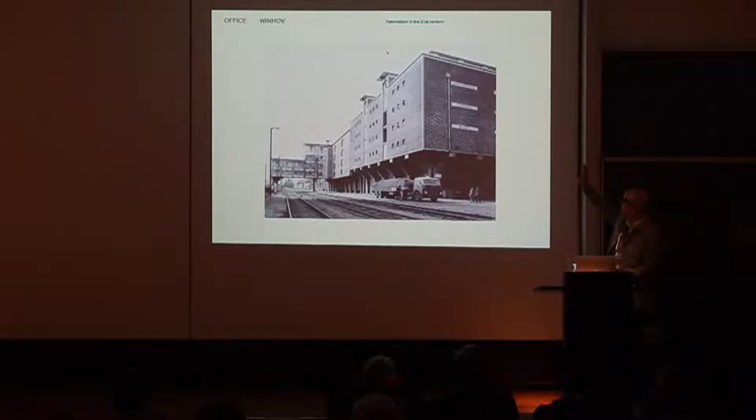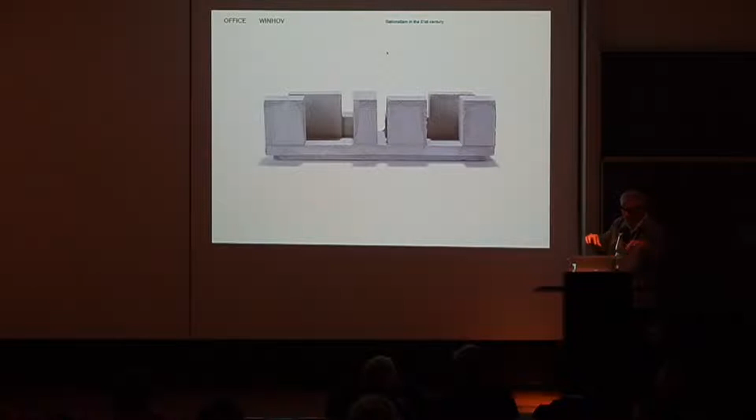And as young architects, there were 3 offices that we also more or less grew up as a generation through these projects. We were asked to work on 6 towers, 2 buildings along the water, on a double-story parking garage. And to understand it, we had this small model on our table, and we were asked to do the 2 outer small blocks. 10-story high, or 11, social housing.

I won't go too much into the plan, but we were very fascinated with how you could construct a brickwork facade, how you could think through what it means to make a warehouse, actually. It wasn't so much a housing project for us. The idea was more to build a contemporary warehouse, a very neutral structure with a very neutral facade, where the living room could be the same expression as a sleeping room, as a loggia, as a kitchen, because it would change over time.

The whole design concept was that of a kind of open plan construction that you could change. And for us, echoing this idea of a 2-story plinth and then changing the structure of the building on the 5th floor so it would resonate with the harbor buildings along the water was of interest. So we built those 2 towers, and you see a brickwork facade, and a very practical one is a horizontal concrete band that projects a little bit out.

The outward projection is quite simply for fire safety reasons, so that the fire from one floor cannot go to the other floor, so that we could do these floor-to-ceiling openings that you could open, so that at least you could look out over the city. And originally we proposed to the city we do 2 exactly the same buildings, because I couldn't think of a reason to do 2 different buildings.

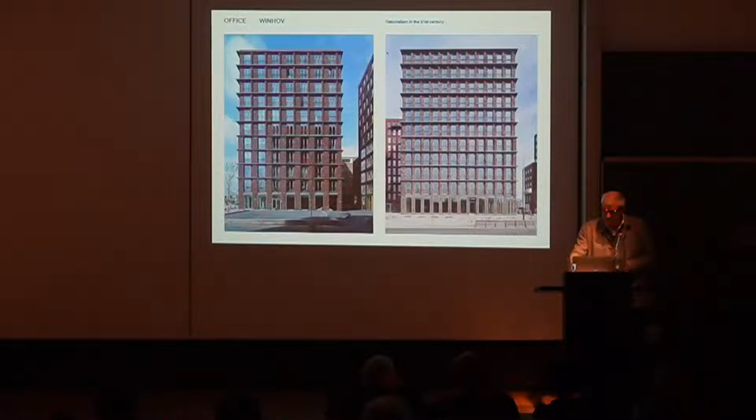So it speaks about the logic of construction. It speaks about the use of material. And of course, it speaks about where you build, where you are. And this rationalism, if you like, was pretty much there for us as a way of working, both in its logic, in its practicality, in its no-nonsense character, but also as a sensitivity to a place, an idea of type. These kind of things really stuck to us quite early on.

So I thought I'd continue then on concrete and not on bricks this time. We do a lot of bricks. I still love to work with the material, but we did a whole series of concrete buildings. And it's for the very same reason, the material I'm very fascinated with. We are working on a whole series of towers, or this kind of mid-high rise, 70 meters, which is the new urban standard in the Netherlands.

And I like to show them to you as how we work on, also that projects start to influence one another. So they become like a series, you know, it's the one individual object, but you invent something, you take that with you into a next project. So one of the joys of an office is not so much the singular projects, but it's this kind of line that you build up, this knowledge that jumps from one to the other, these kind of small discoveries that you make, that you take along.

This journey more or less started when we were asked in Switzerland with our partner Zeno Vogel to work on a high-rise building, Zölli, in Zurich West, where actually the plan and the structure was designed by Meili Peter Architekten, good friends of ours, and their facade was rejected. The office was a little bit in crisis. No, it was not a little bit. It was very much in crisis at a certain moment, and they asked us, please help us to design that facade.

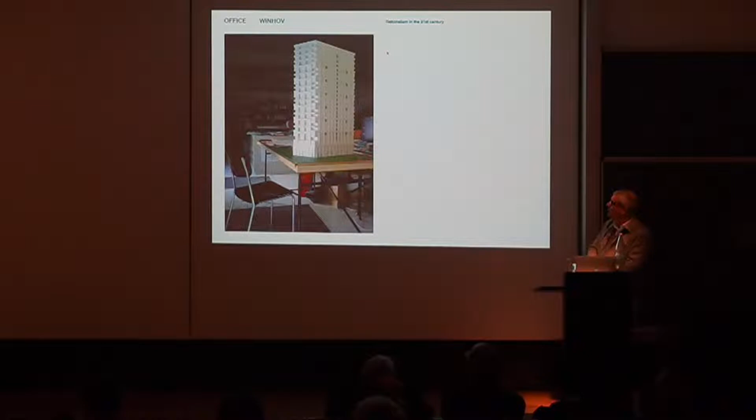And, you know, we went to meet the client, we walked out of that meeting, and there was a kind of advertisement on the wall in the street selling the apartments we still had to design the facade for. So, you know, 3 months, load-bearing, prefabricated facade in concrete. Think, work. So we built a model of the thing to understand it, to also understand how you see a split level on the heads of the building and normal running floors in it. So also in terms of typology, there was this theme of 3 floors that were always combined that we started to play with, and a structure and how you could make it.

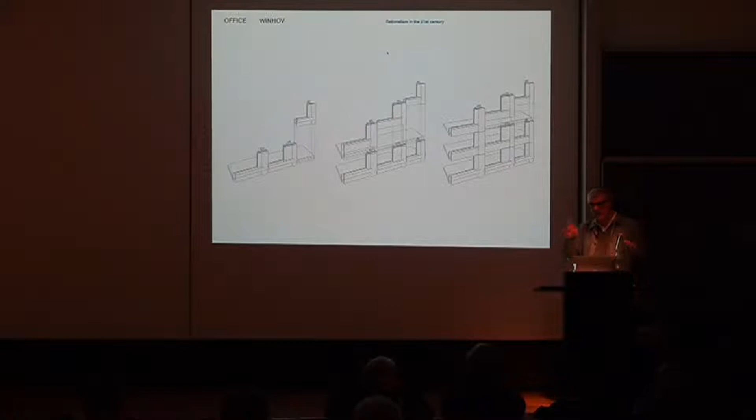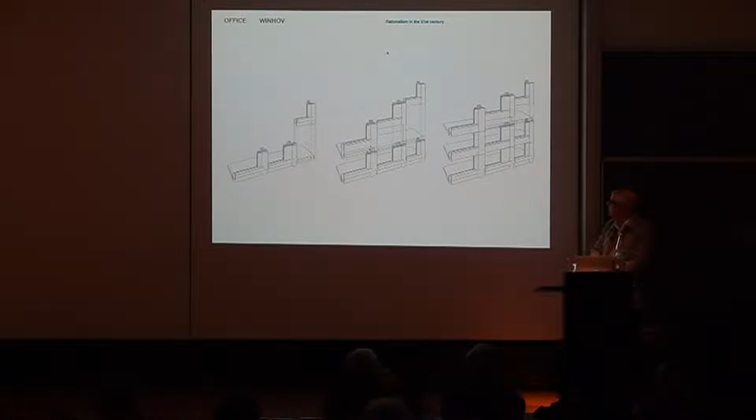And we developed at a certain moment an idea of L-shaped elements that you could stack. The core was in situ concrete sliding up, and then they would stack these elements around, and then they would pour a floor on top of it, and then they would do the next one, the next one, the next one. So there was a construction logic already decided before we came to the table. So for us, this whole question was, do we now make a big element with a window in it? And we decided to develop it in terms of L shapes, which of course resolves problems with joints, defines the window, defines the loggia, and has a certain logic and repetition to it.

And we thought, oh, it's going to be very repetitive, very easy. And then you make this drawing with all the different types that you get in the facade, and it always looks easy. So the story is like, no, we do everything the same. And then, of course, at the end of the day, each one is different. You get a repetition over 3 floors, and then the next one, which in the end was okay, because you can do a certain maximum amount of elements from a cast. So anyway, they would build different casts. So this is the kind of logic that you learn. It doesn't need to be repetitive all the way, because they just make more casts of the same type, so they can also easily make more casts of a different type. So it's this logic that we learned there. And that facade worked like that.

And it was a super efficient building site, which is very interesting. It was 2 cranes and a kind of scaffolding that would go up and down, and the building would just rise up. So no scaffolding around, extremely efficient, short time of building, which is, of course, with these types of buildings, very, very important. Speed of construction in a tower is what defines the price of the whole thing. The slower it is, the more expensive it is. Not about material use. It's really the rationale of building and of construction.

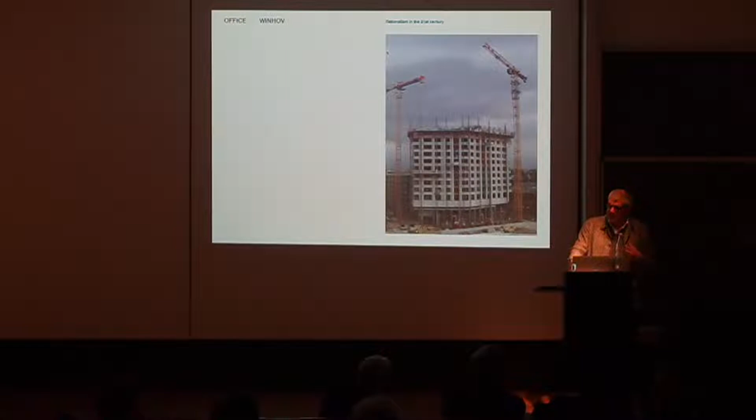So this is the facade, with a small change in the direction of the piers. You read these 3 floors in the rhythm. The rest is very repetitive, very, if you like, rational in that sense. And it really fitted also the site where we were building. So it stands in Zurich West. It's part of 3 towers. So on the left, there's Roger Diener, one of my big heroes. It's also extremely nice to work with architects that you absolutely admire, that have been very constitutional to my thinking. And all of a sudden you start to work together. It's really like, oh, wow. And the other one by Mike Guyer, the office tower.

Well, it really fits this kind of tough climate of the railway tracks in Zurich. And so that journey of thinking through construction was very nice.

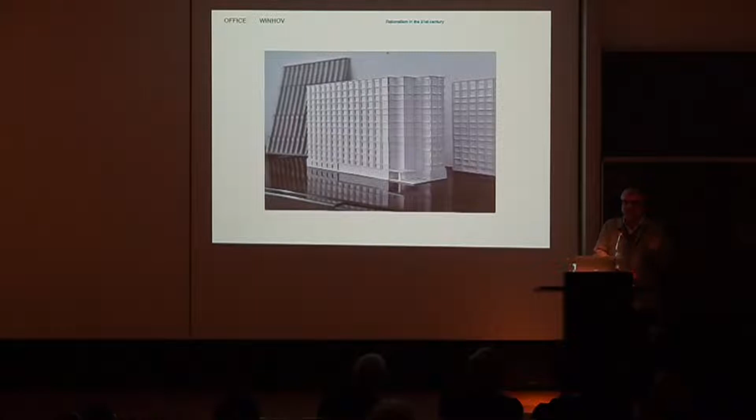And there was a tender for a competition for student housing in the University of Eindhoven campus, where I graduated. So that was like my going back to the school. And it was the first student housing on the campus. And also same question: speed of construction, prefabrication, please, can you think of something? So with that knowledge of Zölli, we started to develop the design for this one.

And it turned out that here floor to ceiling elements were the most efficient. So almost like Plattenbau, you know. And then of course, there is this idea of how is a window going to sit in there? How do you proportion these kind of elements? And of course, the endless game of how do you resolve the joints between those elements? Are the joints determining the image of the architecture, or is it a game or a play that goes on?

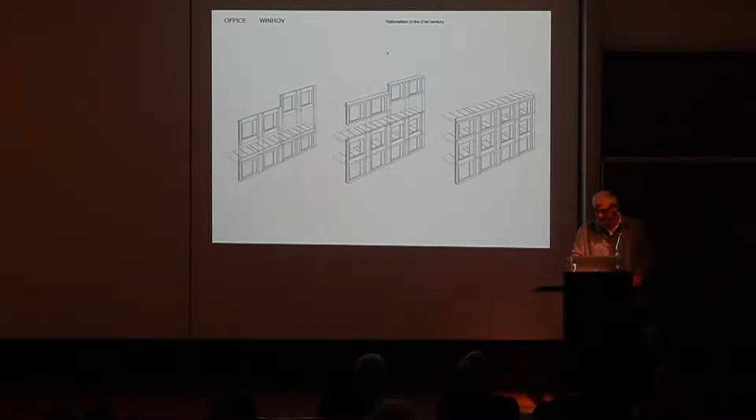So very logic. And of course, the cool thing about prefabrication is that you go to a factory. Building sites and crafts are super cool to work with. I really enjoy building sites, but perhaps I even enjoy more factories. Making a load-bearing facade, developing that with the guys in the factory is a joy. And sometimes you discover things that you don't design. It's this kind of design by the thinking of the making.

So we were at the factory, and the guys were showing us around what they could do. And the man that was head of the finishing department of the factory said, "Oh, I have such a cool machine. I have a polishing machine. You can put it down and it goes around and turns my concrete into terrazzo." And we were like, "Oh, that's super cool." And the client was immediately, "Oh, no, we cannot afford that."

And we were like, "Well, what if with these ribs we put the element on the back and we just let the polishing machine run over the outer edge of the ribs?" And the guy was so happy with his machine, he says, "We do that within the price." That was really decided on site in the factory. It's not like a design, it's not like an endless research. It's a conversation in a factory that defined all of a sudden a game with a finish, you know? And I enjoy these things.

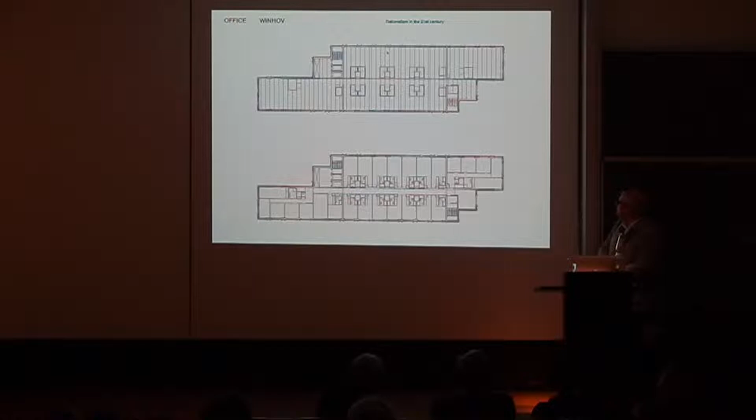And the only thing we did is we shifted the system a little bit, because the proportion of the building that we were getting to was quite boring, I would say. And in Eindhoven University, the buildings sometimes have a more slender proportion, and this game with shifted cores goes on. So for us, that was a theme to play with. That really arrived from the typology of the campus.

So I think at the peak there were 25 people working on the building site. It was the cleanest building site I ever had, you know. People would come, plug in things and done. Everything prefabricated, the facade. Also, what you see there is the bathroom going in. So very fast, very efficient, but a very nice way to build a building.

So very repetitive type. And of course, what you see is these small jumps with a horizontal beam that define a rhythm, that define that you start to count the floors. They give a scale, and they give a certain richness to the image.

There's also this idea of a tectonic expression with vertical and horizontal elements and infill. But the reality, of course, is this: it's one element, but it's a fantastic way to hide joints also. So it's thinking through those things. And then this slender head of the building on the campus.

This was really speed of construction. That kind of developed into this last one in this series that I show: social housing, small studios, 30 square meters. There are a lot of them being built in Amsterdam at the moment. I don't like them particularly. And when they came to us to design them, I thought, oh, do I want to do this?

Because usually you end up with a 3 meter wide or 4 meter wide room, 9 meters deep with a small window. And you know, you have to climb over the bed in order to get to the window. From a typological point of view, I really hate them. So when they asked us to work on it, we told them, we'd love to work on it, but then we do a wide house.

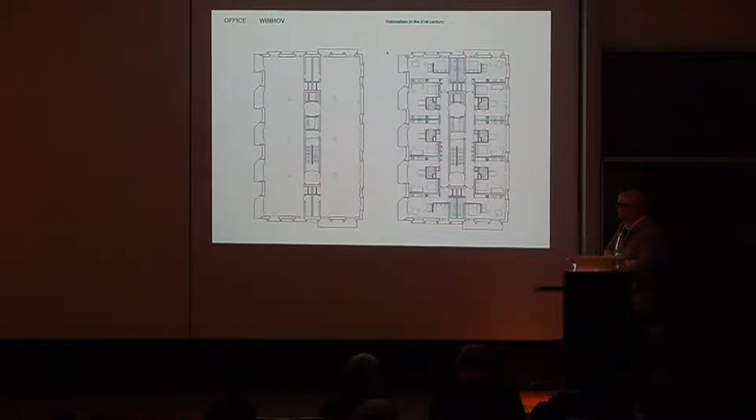They accepted that, and in order to do that, we had to prefabricate that building, because also here, these were again 70-meter towers. Speed of construction is everything. You can do this when you build very fast. So we designed a core, a very efficient one with a double corridor, and then these houses to it, and then even the houses on the west had to have a balcony, part of the prefabricated system. So it was really the next step to work on it.

It's in the post-war area in Amsterdam, which has a tradition of concrete buildings, which is the modern city of Amsterdam, the modern part. And also here again, working with the guys from the factory, making a mock-up, testing it, and finding out also here that they had a polishing machine.

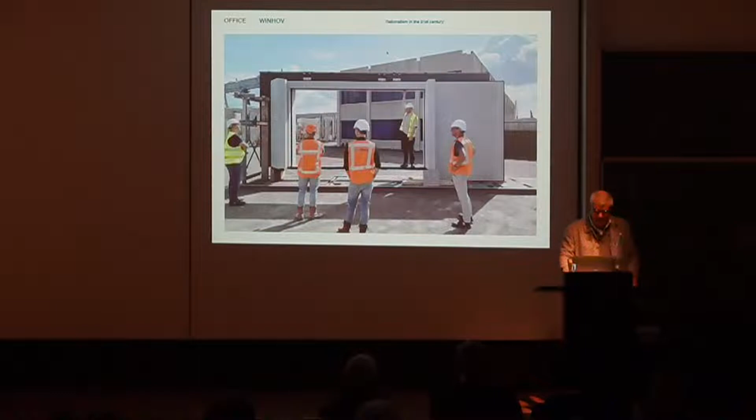So this building was prefabricated. It went up with one floor a week, 27 floors. It took them half a year to make the basement and get to the first floor, and then the second half year, the whole thing went up extremely fast. Balconies included in the prefabricated system. Interestingly enough, they balance in the element itself. They sit in it. They hang on it. But it's a cool thing that you get a small apartment with your own outside space.

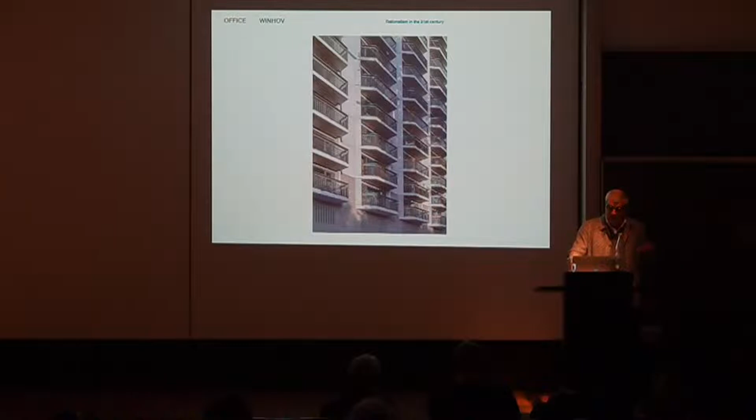And we were discussing with them, what can we polish? And then, since you look at all these balconies from the underside, we thought, oh, then we polish just the ceiling of the balcony. So they polished all our balconies up to a terrazzo quality. So it's very interesting. If you stand in your small studio and look out, you have this balcony above you, and it shines. It brings in the light, and it gives an incredible refinement to this world of concrete.

There it is. It's finished now, so the cranes are gone, and people start to move in. January 1st, they get the keys to their apartments, and I find that very fascinating. It's also a type of building that really fits this post-war area. It's not trying to be sentimental about that part of the city. I really enjoy that part of the city, and I think buildings like that also fit that part of the history of the city. I will show buildings later on that have a completely different urban setting, that demand a different answer. But in this case, it really is part of that site.

And of course, it plays with proportioning a building, reacting to horizons in the area, a small homage to Auguste Perret here and there, and then you have a fantastic building.

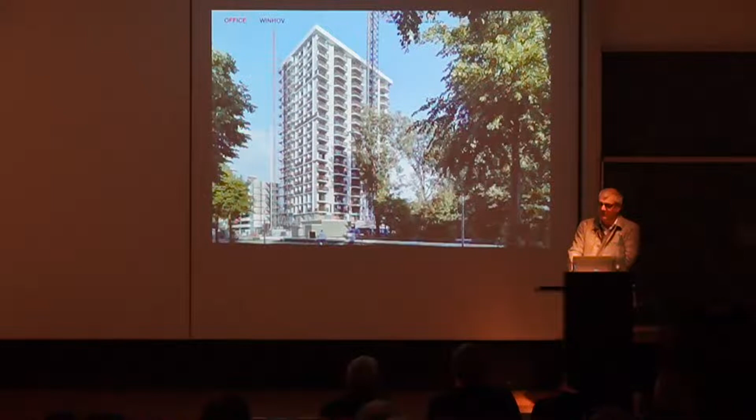But I think it's not what I would like to lecture about tonight. The question is the 21st century. So rationalism in the 21st century. You know, what is now the 21st century? What's it going to be?

I am 30 years in practice. I have some years to go, I hope. But you guys, this is your problem. This is what you are going to be confronted with. This is your working area. This question of what's going to happen in the 21st century.

And I think if there is one big thing that's going to define Western European architecture in the 21st century, it is the fact that we are going to stop demolishing buildings. Just from a sustainability point of view, this whole idea that you take down a well-constructed object doesn't make sense anymore. There's so much embodied carbon, so much embodied grey energy in those structures that working with existing buildings and not demolishing them anymore is going to be really the big question for architectural practices in the 21st century.

The past 150 years, we built technically quite okay buildings, sometimes a bit of a problem here and it needs some insulation and stuff, but basically they're sound constructions. I think we cannot afford anymore to take them down. So this 21st century question to me is not a question about new construction. You know, SuperDutch, that was all about new construction. Architecture was new construction.

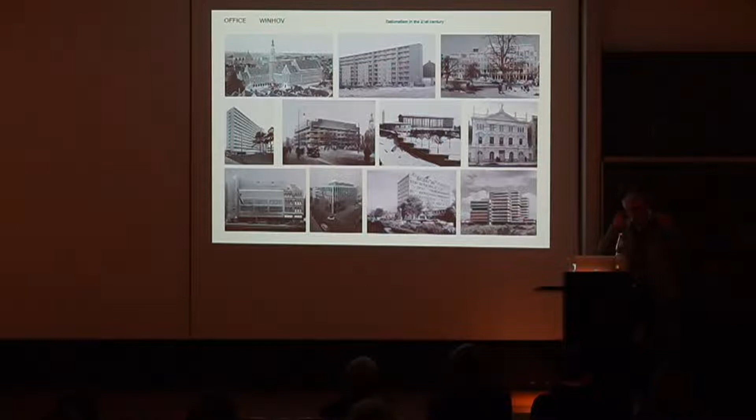So the whole order of thinking is reversing. You have to almost make an argument why you demolish a building. 10 years ago, there was no problem. You just demolished a building. So the shift in the thinking of our clients, the government, among architects is very impressive in the past 10 years. And it's happening as we speak. And I think for you, as young architects, half of you is going to work on these kinds of things.

So there's a set of images from existing buildings that we're working on currently or just finished. And it's a whole range, from very old buildings. I think the oldest objects we are working on are from the year 800, up until buildings from 1978. So this whole range, you get the whole history of architecture on your plate. You get all types of different urban situations on your plate. This is what you're going to work on.

And I thought I'd just bring you a few projects showing how we deal with them. So what's our approach, the method, the way we want to work on them, and try to reflect a little bit on the approach that we're slowly developing. The first one is an extension of a former university building. It's the building in the middle, up there. And it's on the edge of Oosterpark, which is one of these classical urban parks, English landscape design, as you can see, with a big pond.

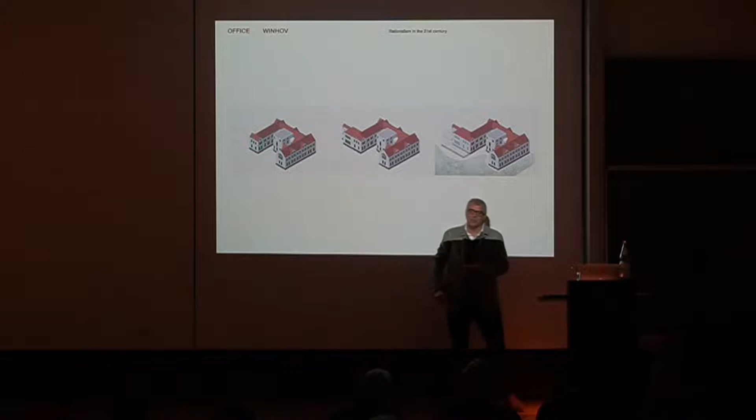And the building permit that was originally issued allowed for the building to be built between here and here. So basically close off the middle court and change the typology of the building from this open U shape towards the park to a closed inner court type. And we thought that was really a stupid idea, for the very simple reason that if you do that, then all the rooms which are in the back are not connected to the park anymore.

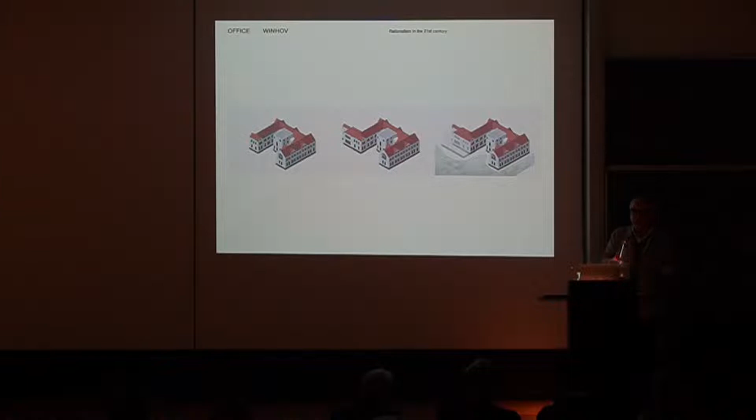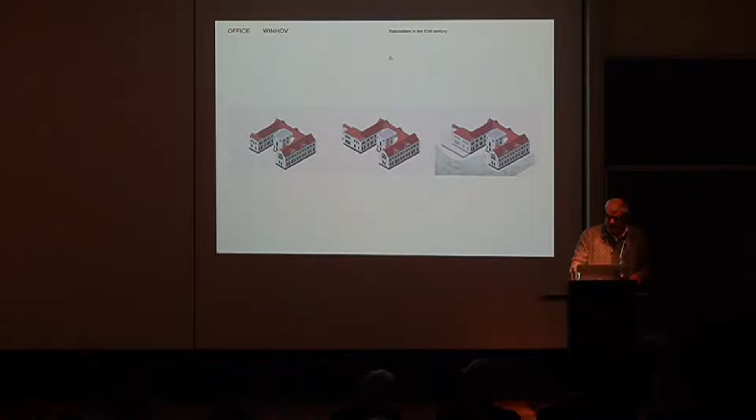And the whole idea was build a building in the park. So what we proposed was, don't build the building there, but put it there. So build an extension to the extension. Point. We won the competition just with those diagrams. So it's a kind of typological thinking related to the park, to the urban setting, to programs that gave us the solution. And this is what we handed in as a proposal. It was a small model, big like that, because you need to keep it in your hands.

You know, these are private investors, clients, so you need to explain your project over champagne and coffees and stuff like that, which means you bring a very small model or you bring a really big model, but anything in between doesn't work. So we chose the very small one that we could take just in a bag, and then we could put the model on the table and explain to them, this is what we're going to do.

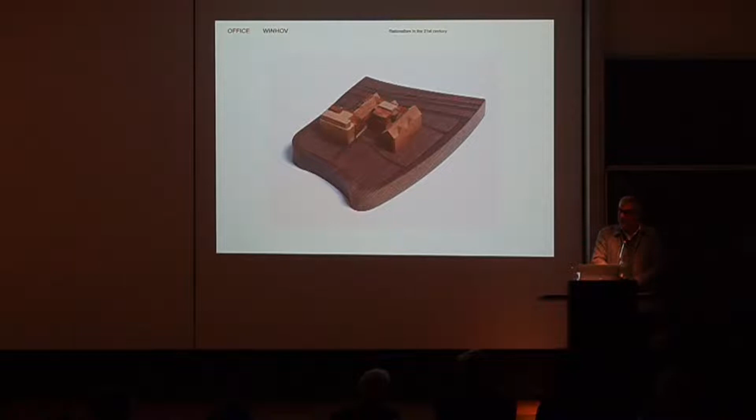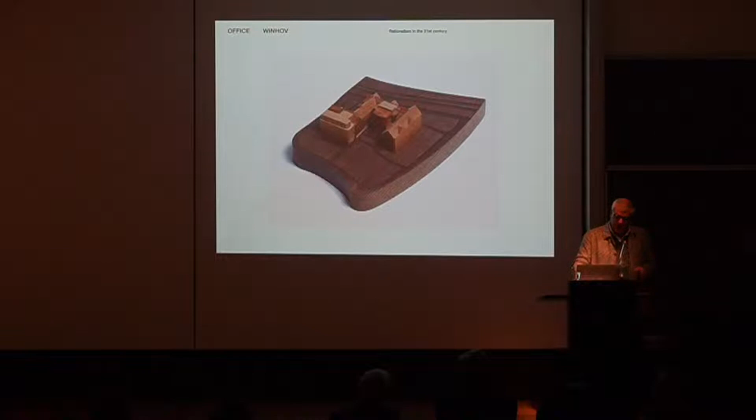And the interesting thing is they could lift the model, go around with their eyes, and just by the fact they could hold that model, they could control the idea. And the client just looked at the model and told us, like, it's a good idea, we do. So it was a straightforward commission. So very generous, extremely generous clients. They bought the building, they developed it, they run the hotel. So it was all in one hand, which is important.

And of course, the joy in brickwork also here was, how do you extend such a building? How do you play with this kind of slightly decorative late 19th century brick architecture, and how can you build a contemporary extension to it? Hotel rooms, basically. And how do you proportion that building? Basically it was a 2-story building with a pitched roof and a kind of half basement situation. And then, in order of densification, that's like 6 stories next to it. So how do you proportion a building that still talks to the original building?

But also, there's an incredible amount of program that comes to it. You need to add a parking garage, you need a back of the house, you need a preparation kitchen. There are 2 restaurants in this building. There's 100 hotel rooms in it. So what we did is we said, okay, we build you that parking garage and the complete back of the house underground, and the park can run on top of that towards the building.

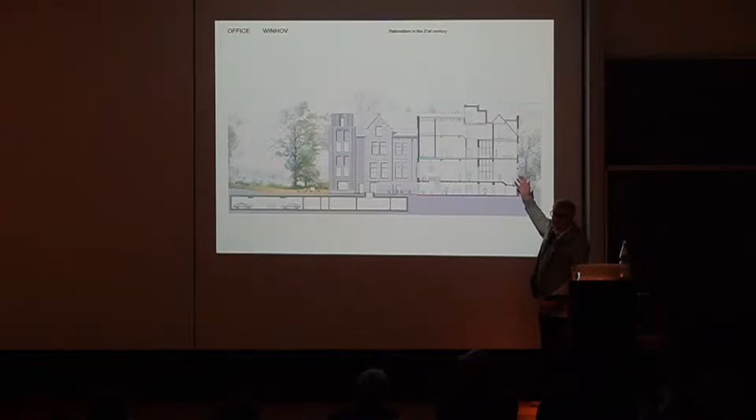The other thing that we do is that we lower the building by 70 centimeters so that this becomes a full floor. So basically on the park, this is ground floor, but on the street side you go up and this is your first. So you have like 2 first floors. And of course the attics, but that's a no-brainer that you use them. So interestingly enough, we tripled the amount of usable surface of that building. That's kind of economic thinking to it, which is very, very important.

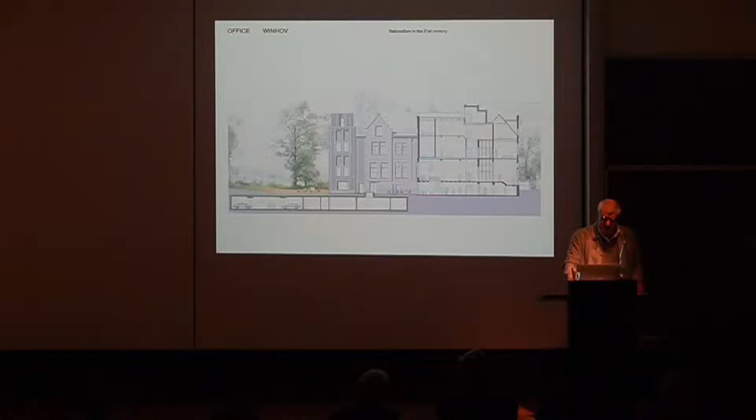I mean, to work on existing buildings, that's a high level of investment. So also there, the building site is pretty complicated. It's a big one. And we always think we don't do so much to the building. And in reality, this building was on jacks for a while, because we had to lower the basement, which means that all columns needed to stand on a jack, and we took away all the ground floor and the foundation, lowered the whole thing, and then built the columns under the existing columns, which is pretty intensive, which means being a lot on the building site as well.

In the Netherlands, there's a lot of complaints that architects are not attached to the building site anymore, and that the construction industry is very remote from architectural thinking, these kinds of things. If you work on existing buildings, you spend, at least as a project architect or as a project leader, 2, 3, 4 days a week on the building site, because there's all kinds of shit problems that you didn't think of when you were designing the whole thing. And what I really enjoy about those situations is you need to improvise.

The whole building industry in itself is orientated towards the exclusion of risk. You make a BIM model to exclude all kinds of risks, and you have risk management, and everything is about costs and risk. But with an existing building, you basically don't know. You don't know it until you start to build it. And what I really like about these building sites, you need to improvise. Within an idea, you need to improvise. So as an architect, you need to be very flexible.

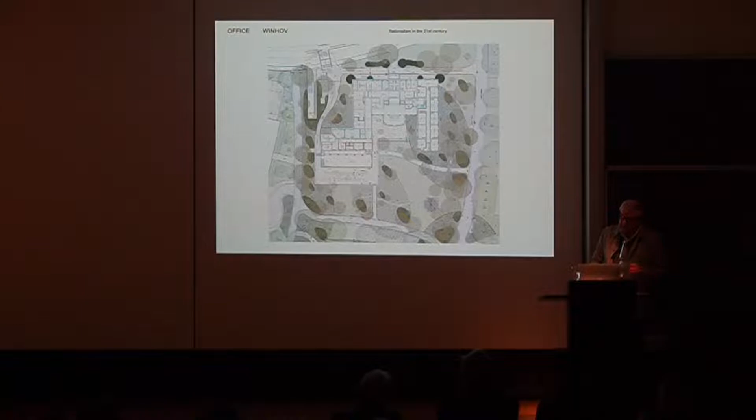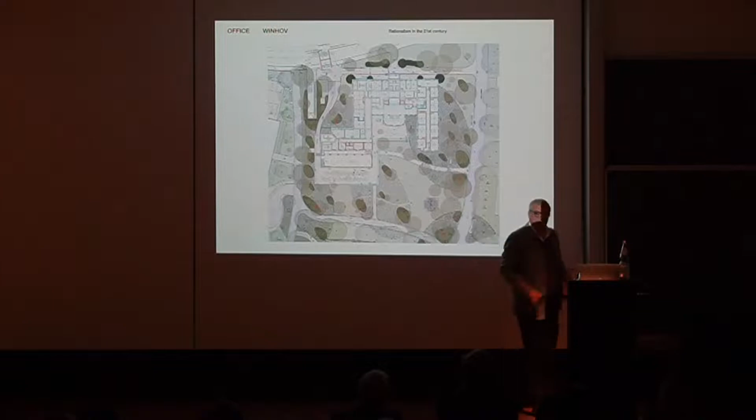So the park was extended around the building. Like I said, very, very gracious clients that said, okay, we do the whole park. You stand there, you won't see anything, and they did so. So there's the entrance of the parking garage. The ramp is within the landscape itself. The landscape goes around, and actually the blue line is the private property line of these people. And they just gave the entire property back to the city, so you can walk around.

It's restorations, which is very interesting to do, because you really get to work with absolute building experts. People that really love their craft and their profession. That's really something lovely about working on existing buildings. It's also a different type of contractor that you get. And it's not better or worse than the guys that do my prefabricated concrete elements, but it's basically the exact same conversation. How do you do it? What do you do? How can we support, or how can we organize it in a way that you can do it the best way?

Which was very interesting. And for example, in these corridors, there was no electricity or sockets available, and we didn't want to touch the walls. But we had to do a fireproofing on the very small steel profiles that hold the brick vaults. So the only thing we did is we extended that a little bit, and all the installations are within those small steel profiles on the ceiling. So sometimes you're a bit between a detective and an architect when you design these kind of things.

So the theater of horror turns into a Michelin star restaurant. That's all part of the game. Funny enough, on the outside, we just restored it. We brought it back to its state, and very interestingly enough, when we started, the building was not listed, and when we finished the whole project, they listed it as a monument. The world is full of paradoxes there. But it's interesting to do.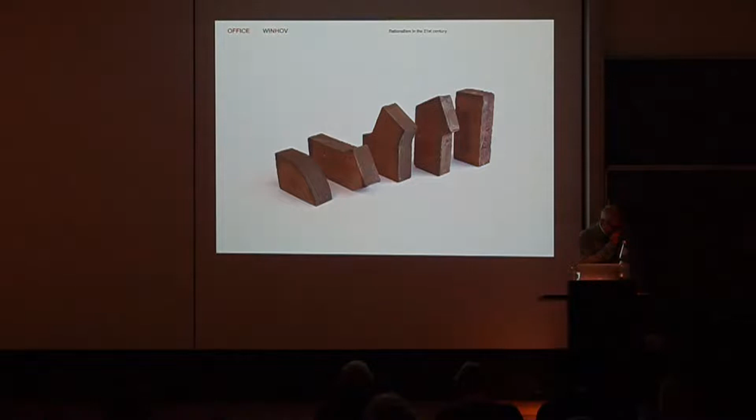So the park goes around. The extension stands next to the existing building. There's like a conversation with it in terms of proportion and materials. And of course, it's fantastic to do a brick facade. I really love bricks because they have this capacity. The whole design of that facade was based on 5 bricks, but with funny shapes, so that we could do funny corners or a projecting brick. And of course, you don't want to have a joint exactly in the corner because that's the weakest point of the whole construction. So we had all these shaped bricks.

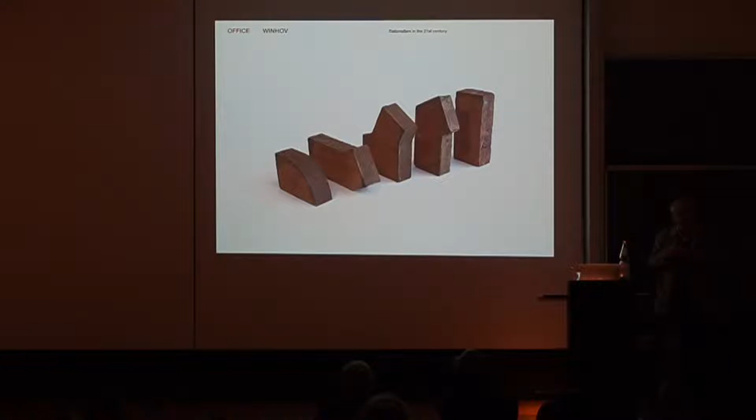And then, of course, you design that entire facade brick by brick and you color it. Each brick has its own color, and we go on the building site and we have to explain to the mason, this brick goes here, this brick goes there. For the first 2 weeks, they go crazy. And then after that, they really started to love it, and it was fantastic to work with the guys. And it was really a joy to explore the possibilities of expression in brick again, in a very decorative fashion, if you like, really as a cladding, as a dress around the main construction. It also has no constructive meaning to it except to hold up itself.

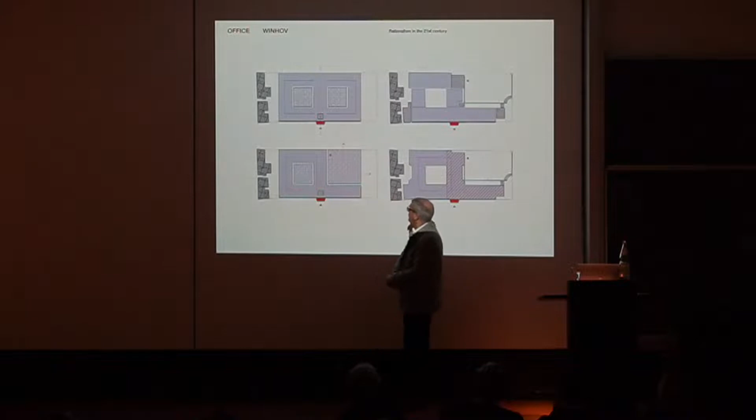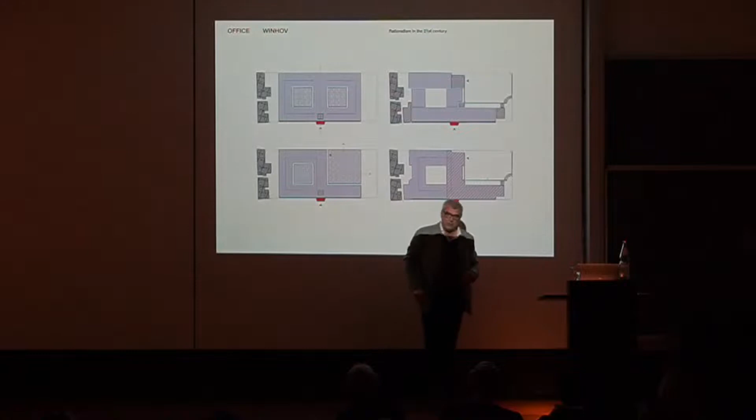He accompanied the original entrance with a second one on the square, and since the original building was on a dike, this entrance is one story lower than the street, and this entrance is one story higher than the street. So there's a two-floor difference between both entrances. So this very simple typological scheme, if you start to think it in 3D, becomes complex.

Then up there he shifts the tower to the square. He makes an entrance building and he slices up the building in order to have like houses that talk to the size of the historic tissue of the city surrounding it. These are small houses, so he couldn't do like a big building in it.

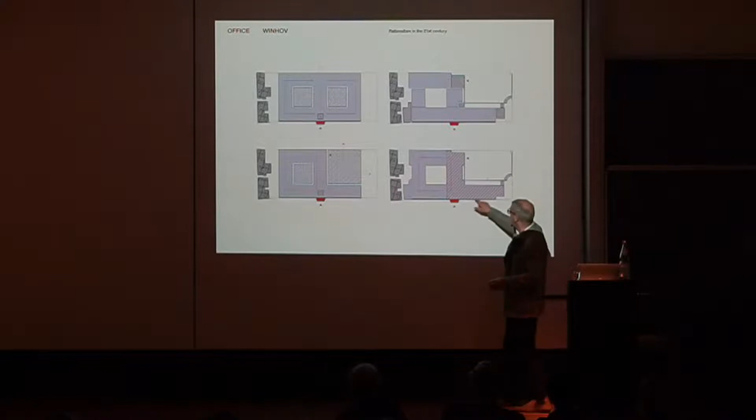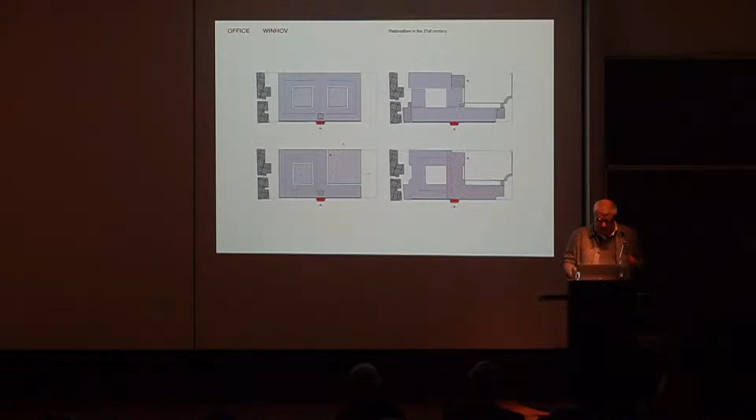And then he organizes it in a way that all the public programs go in this shape, facing the street and the court, and all the offices are in the other space. So we really had to analyze that building to that level in order to understand what he was doing.

They're completely modern, had the installations in it, everything. But then on the outside, it's a really fascinating building. And then on the inside, he cladded the whole construction again. So on the outside, it's all bricks, very nice, romantic, traditionalist Dutch city thinking. And in the inside, you're in Italy all of a sudden.

There's an enormous amount of different types of marble being used in that building. It was built in the middle of the crisis, the 1930s. But the city was so proud, and they really wanted to have the most beautiful town hall.

Very interesting. And interestingly enough, on the outside it doesn't talk so much about tectonics, it's not really making an expression of the rational structure, but on the inside, actually, the cladding and the lining really is simulating this structure of beams and columns that builds up the building. So usually what we should expect on the outside is very much present on the inside here.

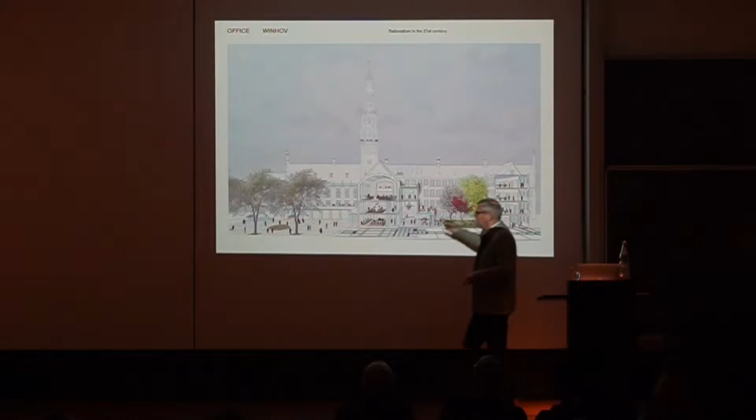It's really like, oh. So in the competition, we proposed: take the original scheme of Blaauw and take the typology of that building seriously. Play on the contrast between a public court and a green inner court. Play on this idea that you have your main council room on the second floor, and the main meeting spaces built under it in the same wing.

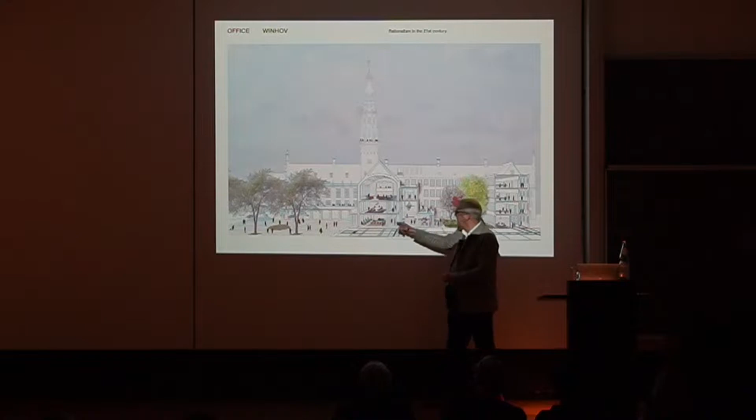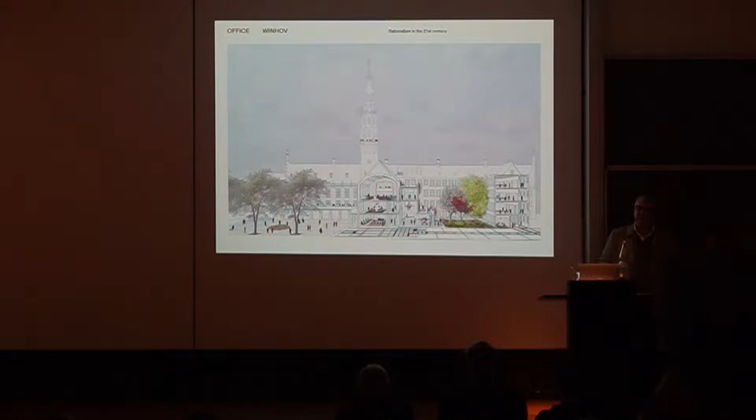Have your entrance really as a kind of public foyer entering and relating to the garden. So all the changes that we needed to do were based on that typological analysis of the building. That was the guiding line of the whole transformation of the building. And interestingly enough, you start to work on different spots. It's not like one project.

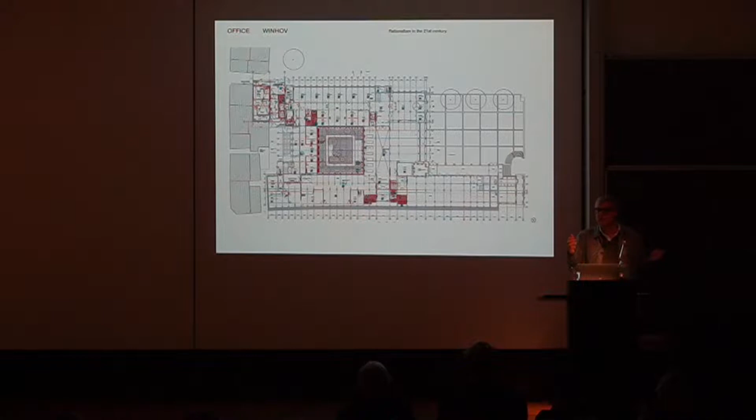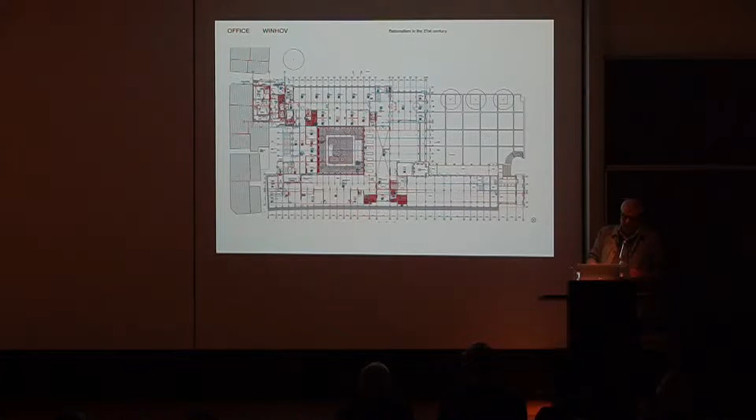Yes, of course, the installations are like one project. But the architectural interventions are here and there and there, and you're all over the place. But in order to keep it together and to define what it is we are doing, material and material expression become very, very important.

And sometimes it's really about restoration, which is fantastic to do. So this is the room of the mayor. We restored all that. There is a fantastic Escher, the graphic artist, in wood. There are these kind of inlays from Escher, again visible in the rooms. So really refined restoration work.

Sometimes it's also about adding new elements. This was a beautiful office with a kind of wooden lining, carpet in it. But then you see it on the ceiling. We had to hang in cooling and lighting elements and heating, so modern technology fitted into such rooms. It's really precision work to do it.

And sometimes you also really take away things to open up the building again, to make a really generous entrance to the building. So here you see that concrete construction standing. We didn't want to clad it in marble because that made no sense, but we developed a set of materials that we wanted to work with.

I mean, plaster was of course obviously one, but then plaster, can you proportion a plaster wall? Small questions. Of course, we couldn't use the marble that Blaauw used, so we thought, okay, then we use terrazzo as a kind of aggregate version of the marble, and we play with the same patterns that he played with as a kind of tectonic expression of that building. So you use a set of contemporary materials to resonate with the original design.

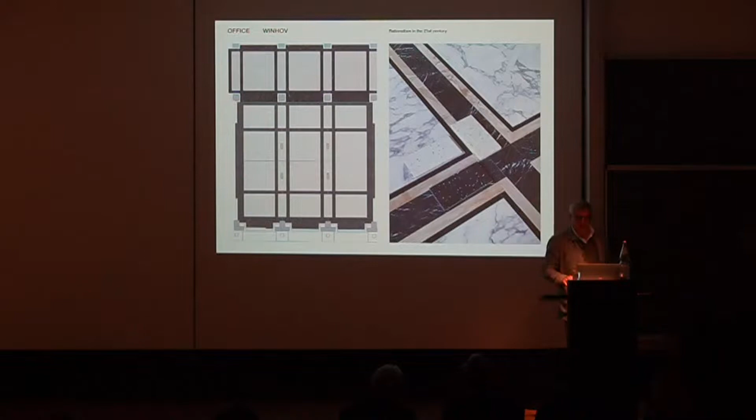There was Anna Tabalini, she was Italian, she worked for half a year just drawing those floors, getting the right samples, having the colors match, all these kinds of things, fitting in the electricity parts, but also resolving the expansion joints that you need in this type of floor. So really a work within the work, and it was really fascinating to do. And I still enjoy very much looking at her drawings of those floors.

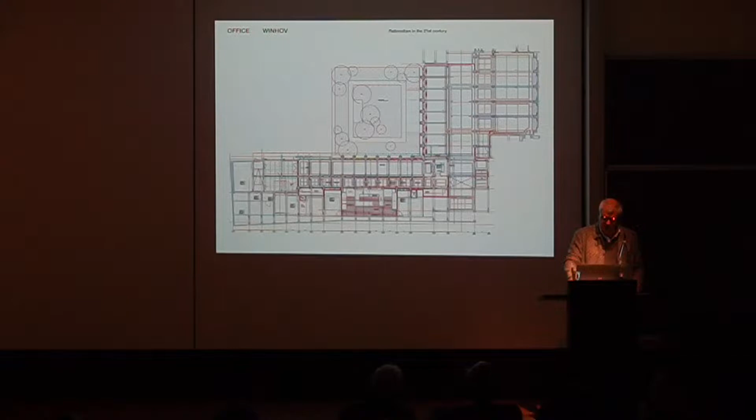You see them. So, for example, there was no cafeteria or place where people could have lunch. So we needed to incorporate that again into the building with terrazzo floors. Restoring many of the floors, restoring that corridor with the elevator. So we moved the elevator somewhere else, so the original window was again visible at the end of the corridor, but also working together with a graphic designer to do all the wayfinding and signage in such a building.

It really gets to the details and precision with this type of project. Fitting in stairs, new emergency stairs, and then using the terrazzo also. If you cut through a marble wall, you need something to finish that. And then answering the proportioning of the marble elements just by small lines within the plaster. It's the cheapest detail I did. It's just a plastic profile.

Well, you get a fantastic interior with it. And it really worked. It really took a resonating, if you like, analog approach to it. And of course you get problems where you have three quarters of the column finished and the last quarter to be done.

Opening up that structure on the roof, taking out floors. You will see one of those later again. And there we just left the whole thing visible, barren, so that you could really see that concrete construction for one time, not being finished, not being cladded, just bare and visible.

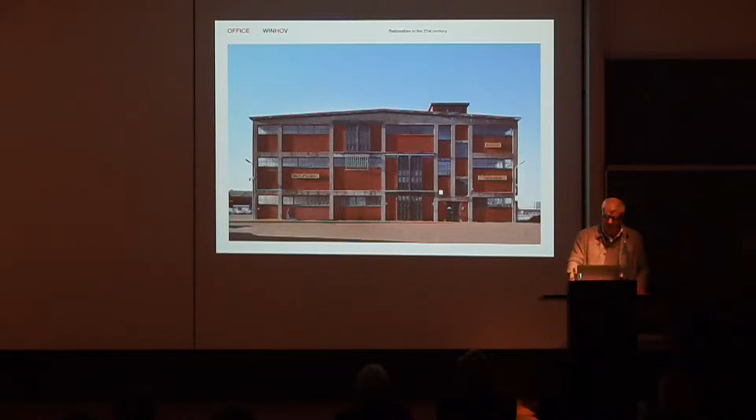Things being maintained there. Chrome 6 painted, which is like asbestos, but then in paint shape. So they didn't know. Otherwise, they would have destroyed the building if they knew before. But we designed it as a reuse of this very modest structure.

And the other structure, which was along the water, was called the Mastenloods, where the masts would be built in there. So it's basically very long, elongated halls. And when the masts were out, they used to store torpedoes in here. So it used to be the torpedo shed for some years. But a wonderful wooden construction standing there. This was a first-grade listed monument, this building, because of that wooden construction.

Uninsulated walls, very little light, and make me a town hall. That was the commission. So we proposed them a situation where we said, the sheds, that's a one-story building. We put all the public programs in there.

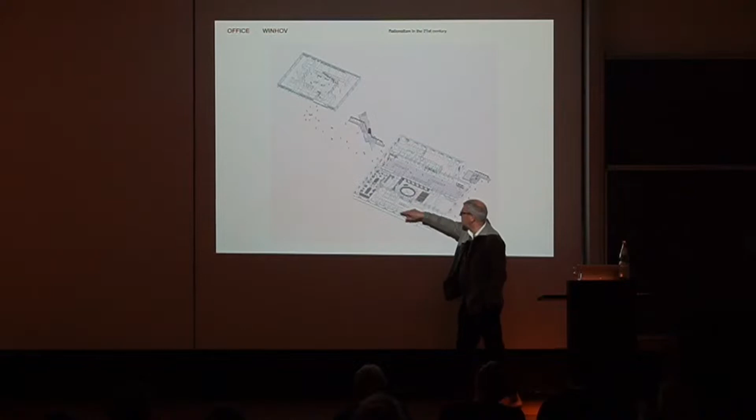So we keep this street running in the middle of the building from one side to the other side. We put some offices to this side with the public desks behind it. We put the council room in the middle, meeting spaces around, cafeteria, wedding room, main meeting room. That's it. That's the program of it. And then the other building, that's a working building. It's the office building for the municipal organization.

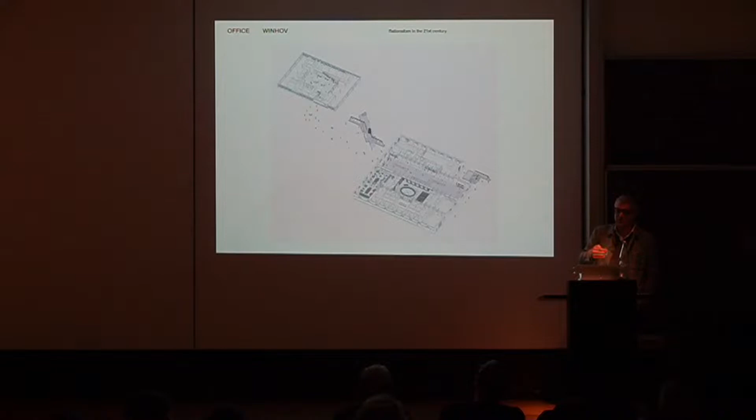Interestingly enough, that shipyard used to be a place where people would walk from one building to the other. They had to get around. And by now, all those buildings are closed because one is a theater and the other is a restaurant and the third is an office. And what we really enjoyed was this idea that people would start to walk from one building to the other again, this kind of charging up the public space.

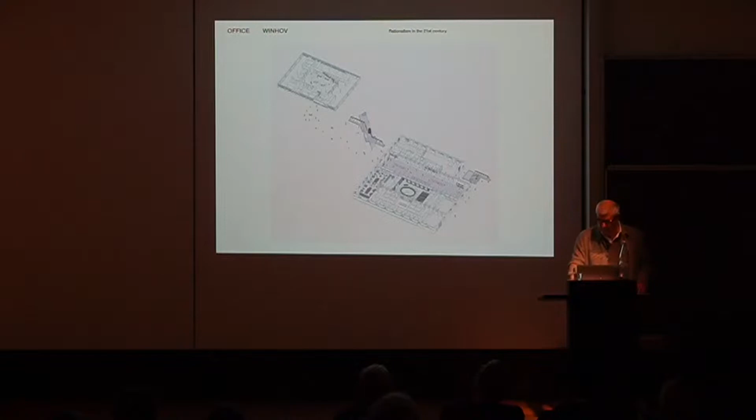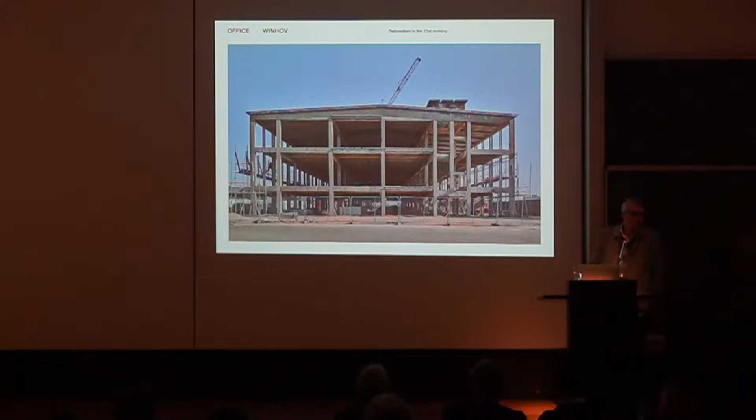So the definition of that building for us was its construction. We said that defines the type. That's the quality of the thing. But this is also what the building was, just a naked concrete skeleton with no insulation, with no infrastructure in it. And then, of course, it had to become an office building.

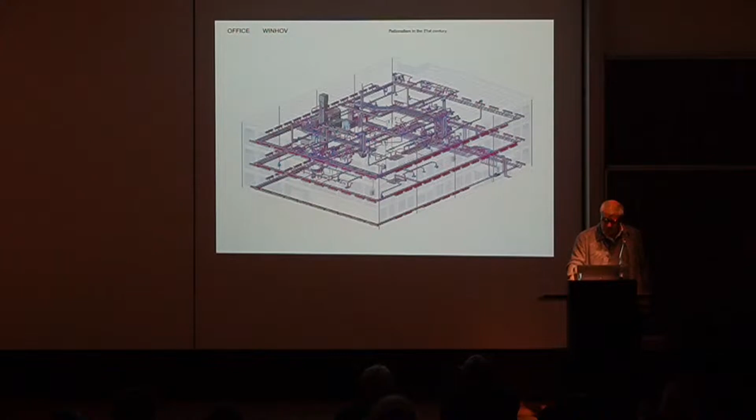So this is the big assignment with all these types of buildings. That's the amount of installation that you have to bring into such a building. I mean, it looks like a medical scheme at some point, but it's the air handling of the building. And we didn't want to have that on the ceiling because there were all these beautiful beams. So we put it on the floor and we just raised all the floor 60 centimeters, which forced us to take out the facades. But it gave us the opportunity to leave that concrete construction completely visible as the identity of the building.

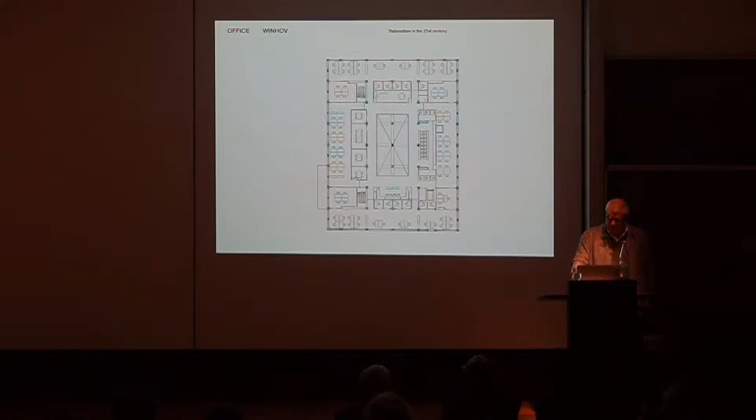It had a very simple scheme, offices to the outside, then a ring of staircases, toilets, lockers, and then in the middle, a void space that leaves the construction visible but connects the floors, which was very important for the municipal organization.

And we had to clean it because there was chrome 6 in the paint on it, so we really had to carefully... it's very strange because it's a very modest concrete construction, but it was almost restored, taking the paint off and stuff like that. But they decided to keep it, so they took it very seriously.

We cut out some beams and we just left that construction visible and built that really as an interior inside of it, which provides a very, very beautiful working space for the municipal organization. And then as they go outside, of course you have these fantastic views from the offices over the deck, over the docks.

Then for the facade, of course, we had to take out the brick facade, an uninsulated glass facade. So we decided to design a new facade within that concrete frame. And for us, it was clear it had to be a metal facade. It was a shipyard. I mean, there were metalworking spaces there. So this whole idea that you could change the infill and really play on a metal world was very interesting.

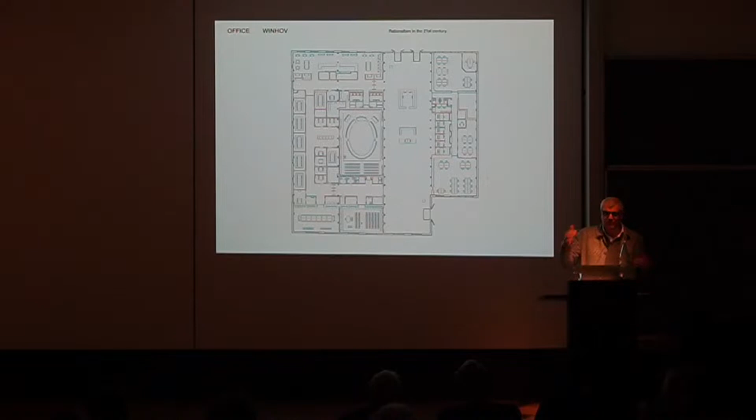So basically we were forced to leave the facade of that building uninsulated and open, which means we insulated the roof a little bit and we insulated the floor. But given the proportion of the building, the influence of those facades on the overall thermal performance of the building is relatively small. So overall, we got a fantastic energy label for this building with uninsulated facades.

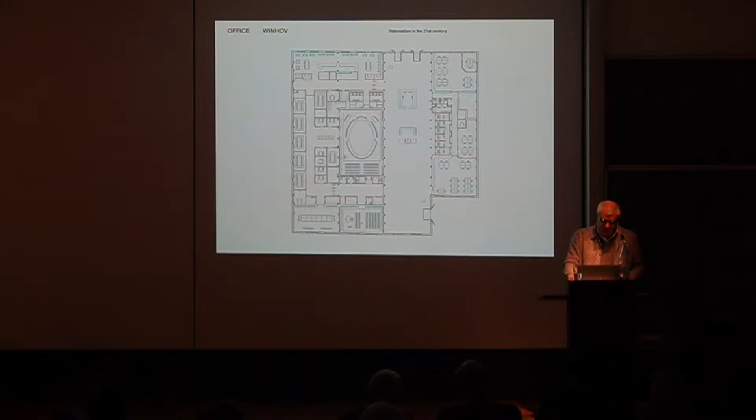And organizing it was difficult enough; you have to build walls within this kind of open structure. It's this fantastic open hall, and then all of a sudden you have to make small rooms in it. How do you do that? There was one small building in the building, that's where the supervisor would sit.

There, you know, it was warm, and you can imagine the stories. But what I really enjoyed was this kind of wood and color and lining and proportioning of it. And we thought, okay, that's the theme that we can elaborate on when we need to build into this. So we measured the wooden structure, which of course was everywhere.

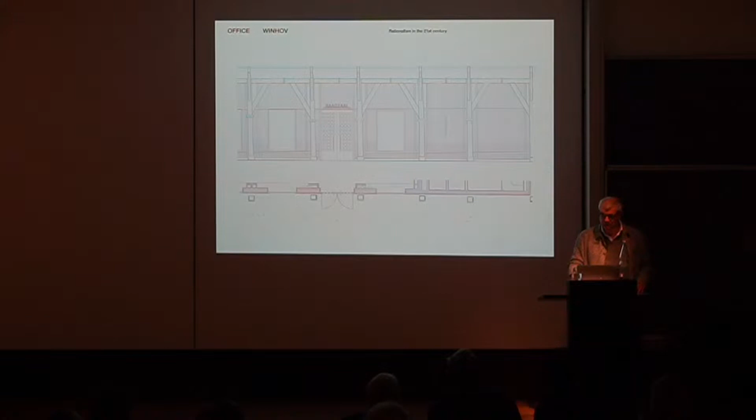And then we built a facade system or a wall system in which we incorporated all the installations. So all the air handling, the acoustics, the electricity, they all come from the walls. The floors we kept open, the ceilings we kept open, everything is in the wall. So it's basically a wall design. And then playing with the proportions comparable to the existing building.

What we really enjoyed was the fact that you could look from one room into the other and still experience the depth of that building. So you look into the council room from that main entrance road. We worked together with Jan O'Haan, who designed the letters and the metal signing, raadzaal, council room.

And interestingly enough, keep open that structure, because it tells stories. All the people that worked on the shipyard, when they would leave the shipyard, they were allowed to write their name on the beam with chalk, which means you cannot clean the beams, you cannot do anything to them, because you would literally take away all the names and the history. So the whole project was also about preserving those beams and that construction, not only because of its material value, but also of all those stories.

People that live in the city, they go there, they stand in this hall and they say, your grandfather, that's his name over there. It's this combination. As a town hall, I really like that. And it's building in small things, reception desk, werkcafé, leaving that magnificent structure. It does the job. You don't need to do much.

Council room, different color, playing with this maritime tradition, the very dark blue. A wedding room with an uninsulated brickwork facade, in a warmer color. But all within the same system of walls, seating in it, heating in it, electricity in it, everything in the wall.

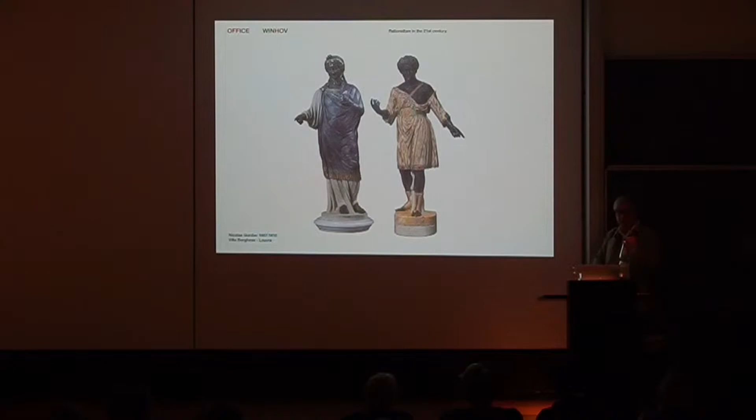And they were analyzed for the first time. And that analysis brought something very, very spectacular, because Cordier didn't make new statues. He recycled old statues within his new statue. So this part is 150 years after Christ. So 1500 years later, being recycled into a new statue.

So Cordier really used all his capacity as a sculptor to collect all these historic antiquities and build up a completely new thing out of that. So it's like, you create something new of your time by using existing elements. And the idea of continuity that's in it, I really like.

The idea of a certain freedom, I really like. And also the fact that it's not nostalgic to those elements. You really use those elements to make something new. So you use an existing building to build a new building. And the new building incorporates the existing building, but it is, in fact, a new building. And I think there this difference with the archaeological approach of the charters really starts.

Last one, I go quick. Materiality, craftsmanship, rationality. This is Zurich. Bahnhofstrasse is probably one of the most expensive shopping streets in Europe for sure, and I think also globally they do a good job there. And Mr. Bucherer, who owns a jewelry line, watchmaker, since late 19th century, had a shop there.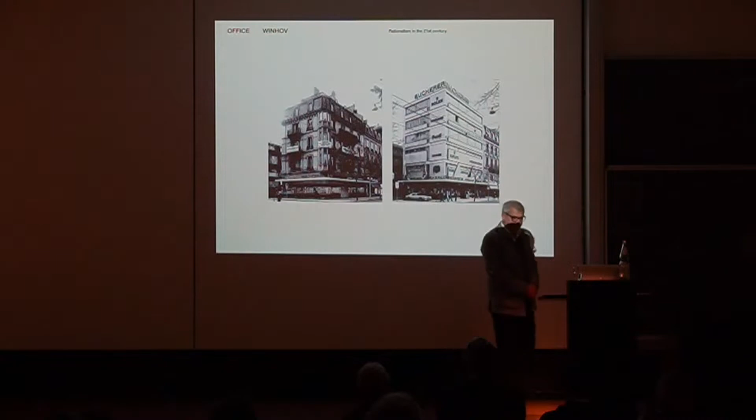A kind of Gründerzeit house, with an erker on the corner, because there's a small knick in the street profile, so that the erker really looks nicely into the profile of the street. And then in the 1960s, of course, the thing had to be modernized, so away goes the building, and there comes a...

Oh shit, and I forgot the name of the architect. That's really a nuisance.

Okay, that will come. He designs a 6-story marble building with golden window frames and a dark natural stone plinth. And of course that is covered with advertisements and stuff like that. And we were asked to enter a competition after the previous design by other architects was declined by the city, with the condition: you cannot take down this building. You need to leave the construction, you need to leave the staircase house, you can do a new facade, but those things have to remain.

And the reason why they had to remain is that if they would do a new building, they could do only a 5-story building and not anymore a 6-story building. So they would lose surface. And the other thing is that on the Bahnhofstrasse, you're only allowed to have 2 advertisement signs on your building. And if you do a restoration, you can keep all your rights to the advertisement. And they're so freaking valuable that they paid for a very, very expensive transformation of an existing building.

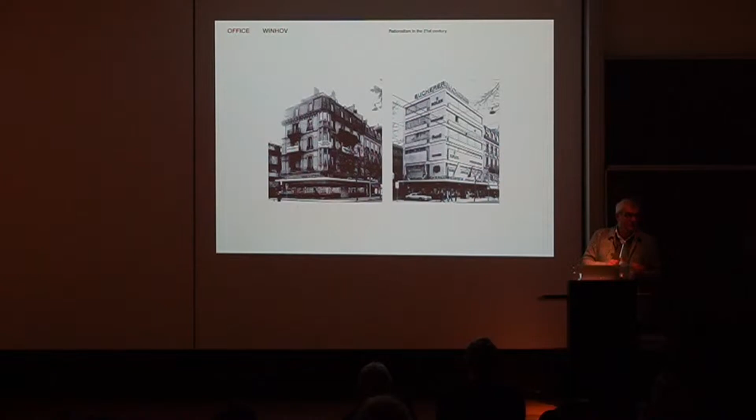The other given thing is the facade needs to be in white marble. Point. So it's a very interesting assignment, no? So this is what it looked like when we started out. A little bit less advertisement on it in the meantime, but still, for Bahnhofstrasse standards, pretty much. Bucherer really on top of it.

I mean, the first thing the guy told us was, you can do everything, but I want my letters back on the roof, you know? So, no question. He's the biggest Rolex retailer in the world. So it's just to give you an idea of what goes on there. And we were very interested in this idea of marble. And of course, that's like our returning hero.

And with marble, combining it with metal, there's of course a tradition of marble in plates and tiles. But if you go to a Bernini statue, that very same material almost becomes like flesh. And metal, if you look at the bronzes of Giacometti, it's soft, has curves to it. So we were very interested in the crafts of these materials, also knowing that our client is a jewelry maker and he makes watches, so he's very sensitive to these kinds of things.

And the other thing we were very interested in is this: this building is about luxury, point. So what's the most luxurious thing in the world? By now it's time. And the passing of time was this idea: we don't put a clock on the facade, but the facade needs to show this passing of time. So we wanted to really play with relief and the expression of that.

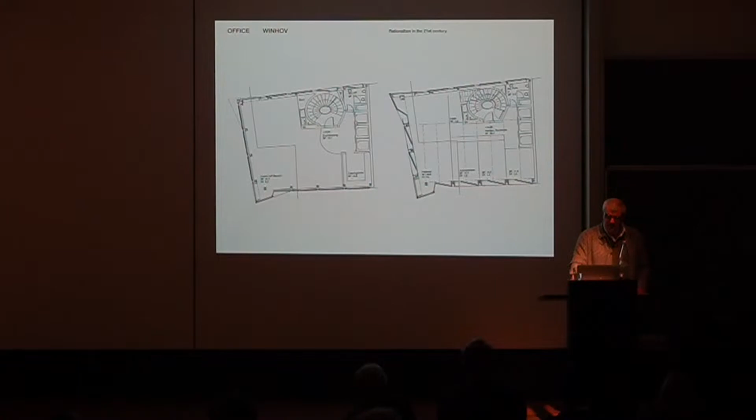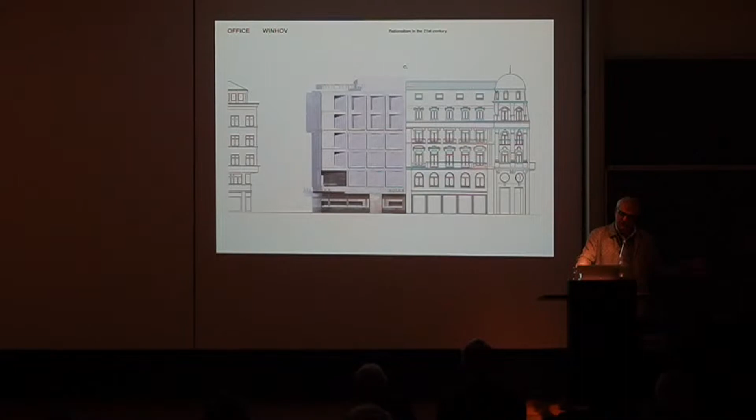So defining that facade system. And playing, of course, with the buildings around, with the proportioning of the buildings around, answering again this place in the street, bringing back that idea of this erker bay window in the nick of the street. So actually recycling part of the 1960s buildings, but also taking parts of the building that was previously there as a type.

And then I think we won actually the competition with this scheme, where we explained to the client, your building is about time, but it's about the passing of the time, you know. It's like these very soft shadows on a facade in which you measure time.

It was a very elegant steel construction with very thin concrete floors. Absolutely not, I say this, earthquake safe, which you need to do in Switzerland by now. So we really had to reinforce on the outside with a kind of steel frame. Then we put 4 centimeters of vacuumized insulation, and we put 12 centimeters of marble in front of it. So usually we do like 12 centimeters of insulation and 4 centimeters marble.

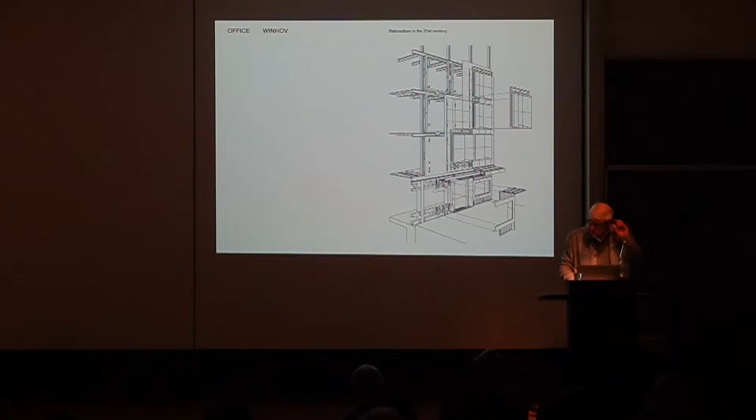The whole project was about reversing that, and the whole project was about prefabrication as well, but then on a very high level. One of those advantages, with these type of clients, you can endlessly make mock-ups and play with them, but the big adventure was this, you know, really go to the sources of materials. We went with the client to the mine, and he chose the blocks that he wanted. So he was really like, I want that, I want that. Okay. No. So he bought his marble.

Then we sliced it up in 12 centimeter thick plates, and we had them CNC'd in order to have these very gentle curves in the facade that would kind of catch time. But then, of course, you get into really 3-dimensional marble designing, which is completely fascinating. And the interesting thing is the marble behaves like wood. It moves, it shrinks. So expansion joints are super important in marble facades, we learned. So it's really this game, it's three-dimensional joint design. That's basically what this facade was about.

All CNC'd. The counterpart of it, we didn't want to do a dark natural stone plinth below that marble building. So we went to the client and said, we think metal, bronze. And it was really a super client. He says, then we go to the art foundry in St. Gallen, which is basically the art foundry where all big artworks in bronze and metal are being made. I never thought that I could quit architecture, but when I visited that foundry, I thought, I could live here. There's super craftsmen working on fantastic metal pieces.

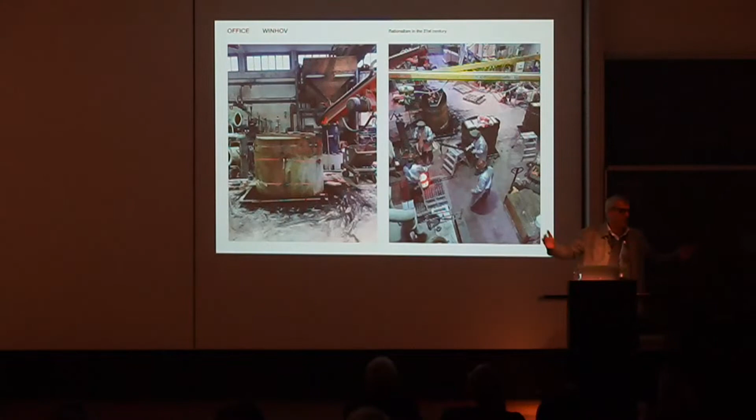And then, of course, she had to put that into chamotte, which is like these clay objects. And then by drying the chamotte, the wax melts away from it, so you have a hollow space left. So the third original is also gone before you get to a statue. And then you put the metal into the elements. It's all kept together because if it goes too fast, the whole thing explodes and you lose everything. So it's really like high-end craft.

And then you need to, with a sledgehammer, take away the chamotte. So that's the fourth time that you destroy the only available original that you have, in order to end up with a dead foal as a piece of art. So this whole problem of originality in the thinking, I really like to look at it because it's such a different way of looking at things. In order to get to the original, you might have to destroy four times what is actually original. Thank you.

Thank you very much for this very inspiring lecture. A bit long, I'm afraid, but no, it was very good. I think it's just super inspiring because we are all dealing with the subject of transformation, renovation. There's a special wish from the students, and so forth. It was very good that you addressed this as a statement also in the beginning.

And what I especially appreciated was that you showed very different types of projects from very different ages in terms of projects to be transformed, renovated, and it showed exactly the difficulties that you have. You have each time a completely new subject, each time completely new building techniques to work with, and in the end, an approach or a concept, if you can call it like this, to develop out of this existing substance. And that's really interesting. Nearly like a lexicon of approaches. So for the students who are dealing now with transformation projects, that was a very good overview about the things to be done.